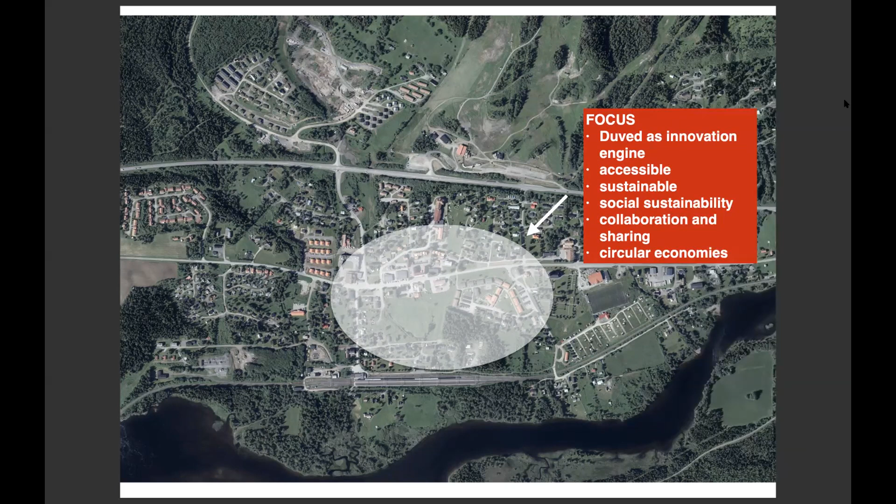Two, democracy. We wanted to involve the citizens from the very start as part of the vision shaping process, to find ways of how to implement the ideas of the citizens into the municipality. We generated village meetings, many of them, bringing the citizens to create the vision of the village together with all the others.

And we're generating and developing a digital tool that will allow the citizens to participate daily on what is possible in their own village.

And of course, we're creating models, and we have a government program for this, to connect the democratic ideas and the citizens' ideas with leading creative competence.

So I think this is important, that we're, as the European Union has said, bringing in creative people like Mia Hägg, like Shigeru Ban, like Farshid Moussavi, to help us do something unique, but based on the citizens' ideas.

And the third thing was the food system, which is really a pilot within the pilot, because everybody understands food, which means that they understand what we're trying to do.

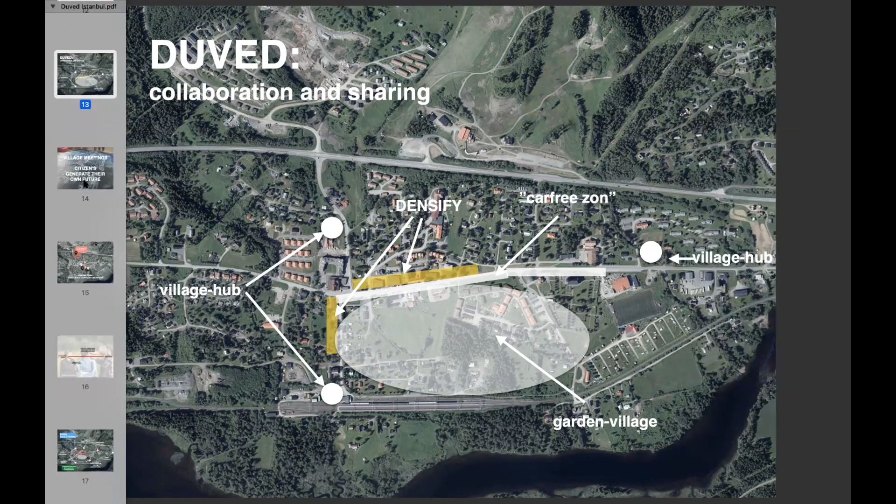We're looking at mobility and infrastructure - this is image 17 or something - trying to create a car-free village. If this is possible, we don't know yet.

And what we call village hubs, where we have co-owned cars, or car sharing. We have storage, and we also have root cellars, so that people can actually have locally produced food all year around, even up north.

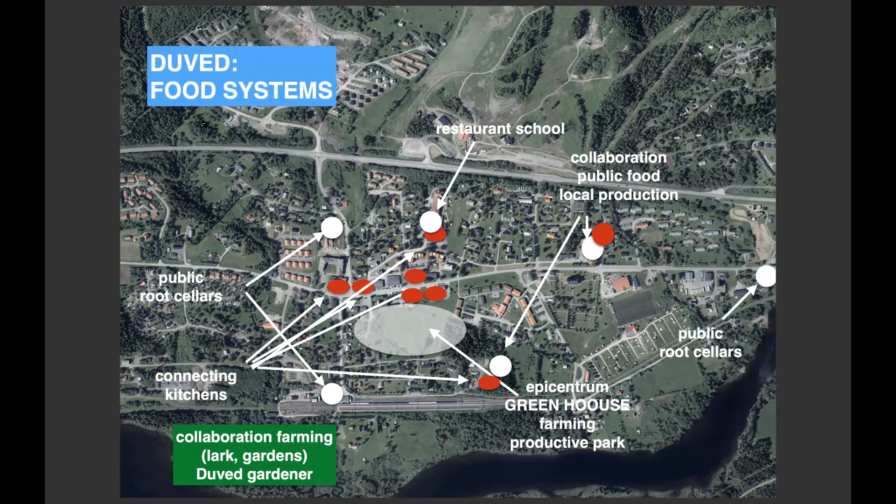And we have realized that the pandemic created new needs. So we actually have in these houses, we can see that one of them, for instance, by Elizabeth Sundin, is now very attractive for companies to come and work two weeks at a time, concentrated, eight people at a time. We didn't know from the beginning that we needed a knowledge and creative system, but that's what has become a very, very important part.

So we're developing something we call campus without university, where universities are gathering in Duved to have students and researchers studying what we do and then doing their own projects from that. It's Umeå University, KTH in Stockholm, even Harvard is interested. So this is a new possibility for rural areas where learning and doing is combined.

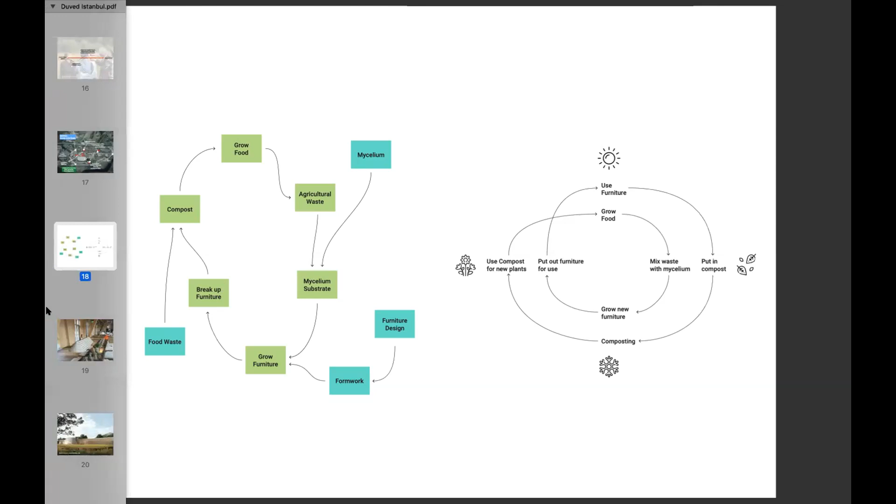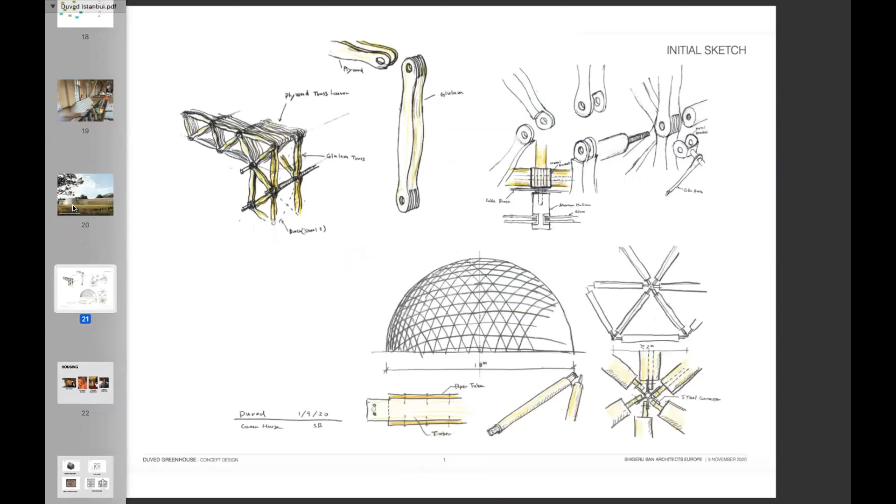And we're also creating a residency program for architects, designers, farmers, etc. And as a consequence of all this, an added and very important part is how to communicate the vision and the results. Therefore, we're planning a larger innovation summit in 2022, which I hope you all can be part of, and in 2023, and then package the results as a Duved exhibition to take the Swedish model from the Stockholm exhibition 1930 to a Swedish model 2.0 in 2025, where the village has taken the place of the city as innovation engine in the entire society.

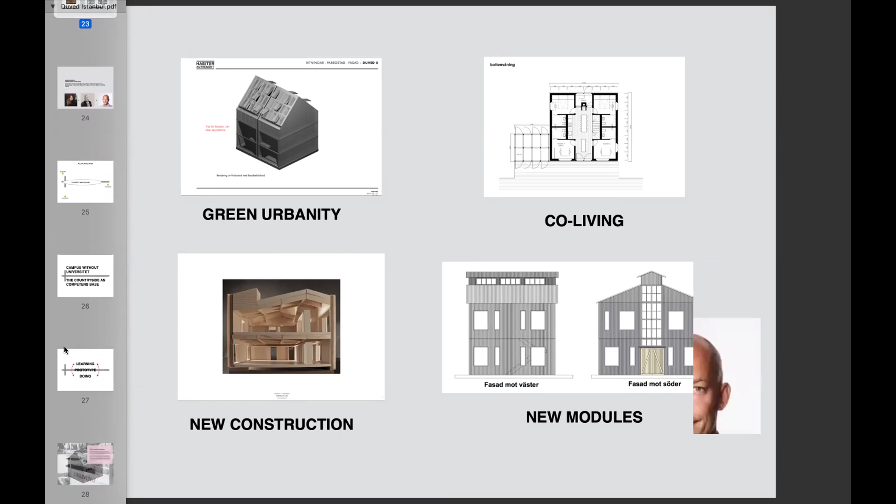That is also why this meeting today is so important. And I want to send a big thank you both to the Circle, to Çakır and everybody else in Turkey, and to the Swedish organizers. And I hope that this can lead to a long-term collaboration with Turkey. Let us generate the future together.

So Mia, now it's time to go from ideas to reality, and a very concrete example of how brilliant creatives can lead the way to the future. Thank you.

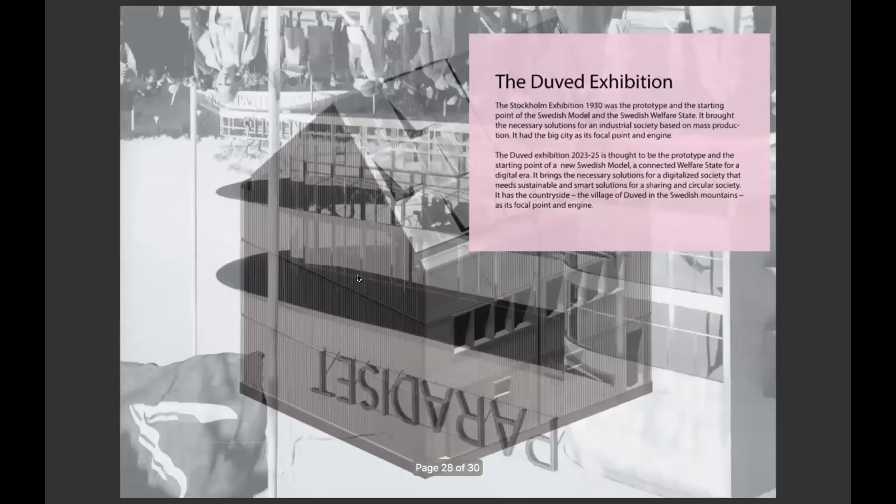Very, very impressive project. So looking forward to hearing from Mia Hägg now. She's in Switzerland at the moment. She's a Swedish architect running her own office, Habiter Autrement, in Locarno, Switzerland. She founded her office in Paris. As the name Habiter Autrement indicates, a particular focus for the practice has been innovative public housing. She started her career in Ateliers Jean Nouvel and later Herzog de Meuron, where she was the project manager for the National Stadium of the 2008 Beijing Olympics. In parallel to her practice, Mia Hägg is also involved in the academic part of our profession. Most recently, she has been teaching at Accademia di Architettura in Mendrisio. For many years, she has been collaborating with Jan Åman on various experimental projects in Sweden.

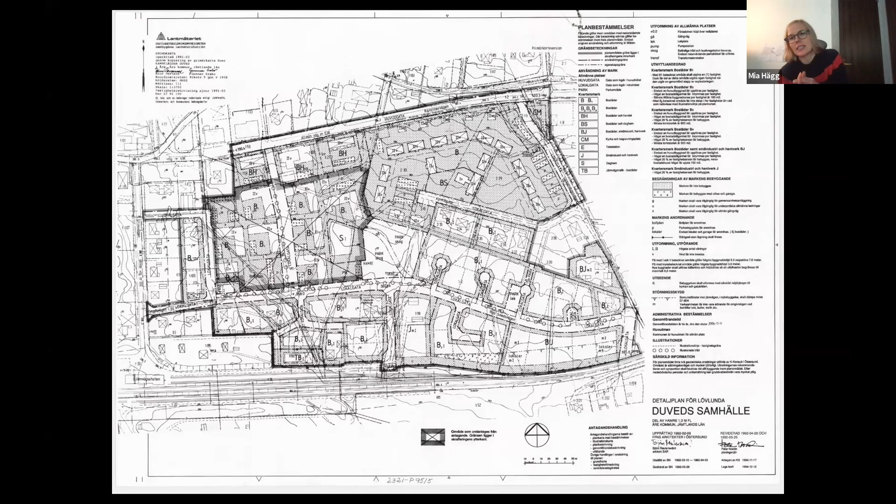The starting point for my project and the 4 architects working alongside me was a very conventional zoning plan from the 1990s for single housing units along the main street of Duved. Here's the main street, and then we have 5 plots for single housing, 2-story units of 200 square meters, which Jan already explained. This plan accepts a maximum ridge height of 12 meters, and that's a lot for a 2-story building. If you add 2 floors you get roughly 7 meters, which means you have 5 meters left to the ridge. So what can we do with the remaining volume? Number 3 in the drawing that you can see - that was the question I asked myself initially.

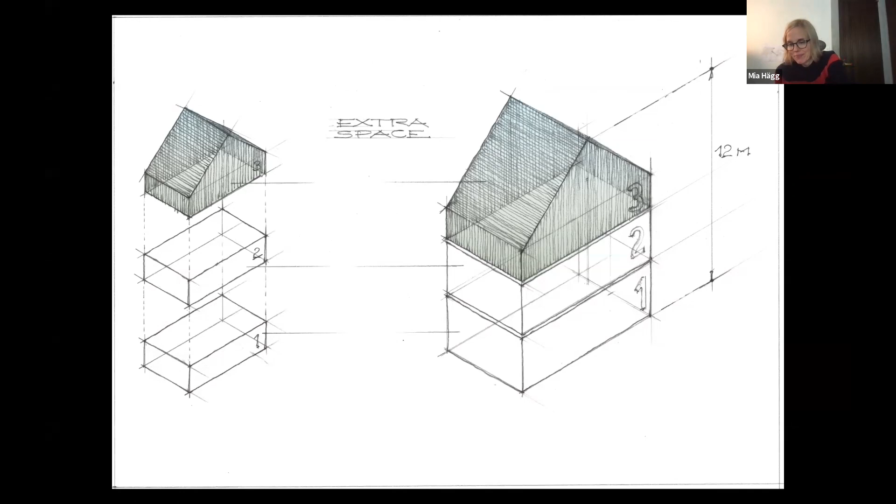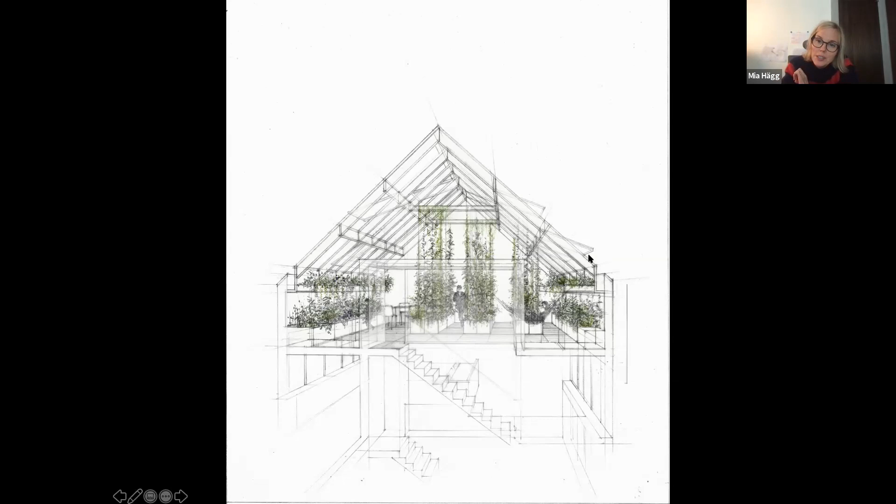A winter garden with a greenhouse under the roof. Here residents can grow tomatoes, carrots, beans in their own garden directly under their own roof. Openable windows create natural ventilation, and rainwater is collected in channels just above the planting beds.

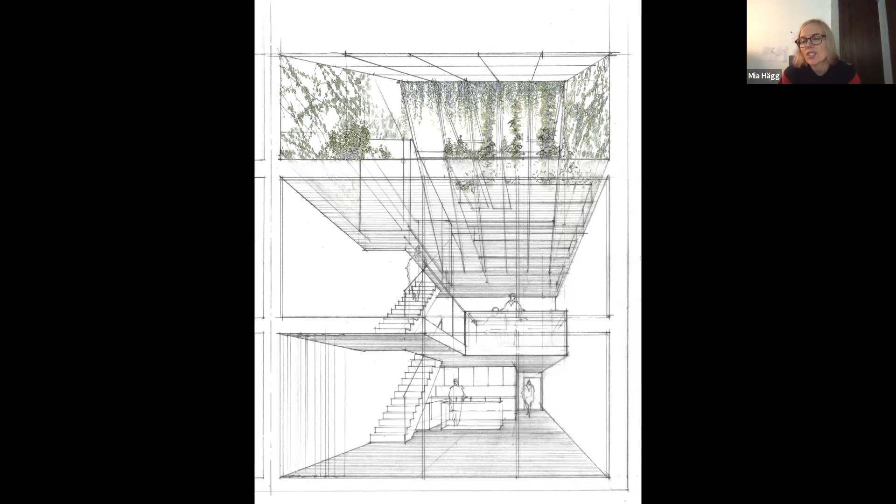It's an extra space for possibilities - a winter garden, an atelier workspace, a greenhouse. An important part of sustainable planning is also, in my view, programmatic flexibility and rethinking of function and use. Our living spaces do not need to be limited to one single function. We need more unexpected space, free of premeditated function, in our homes and workplaces.

In this project, the tectonic efficiency is also very important. The idea is to be able to build each floor like a box in the factory and stack them directly on the site.

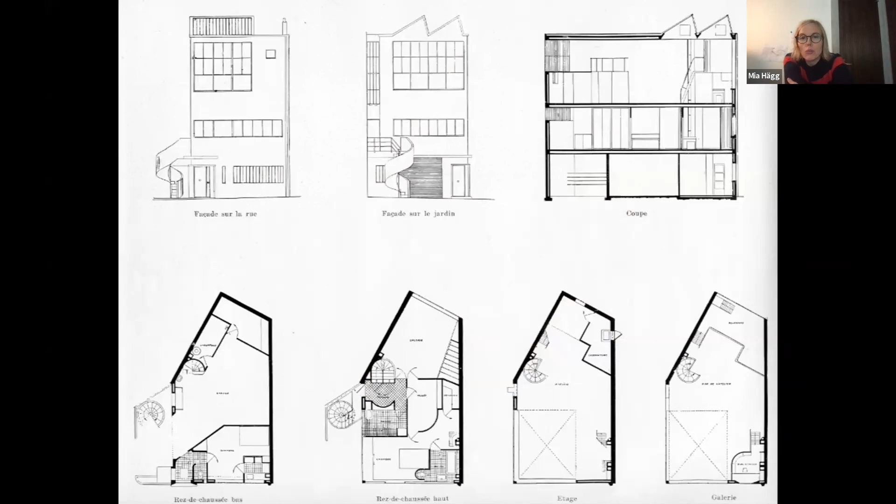The atelier was also an important inspiration in the modern movement, as you know, and here is Atelier Ozenfant by Le Corbusier in 1922, an interior.

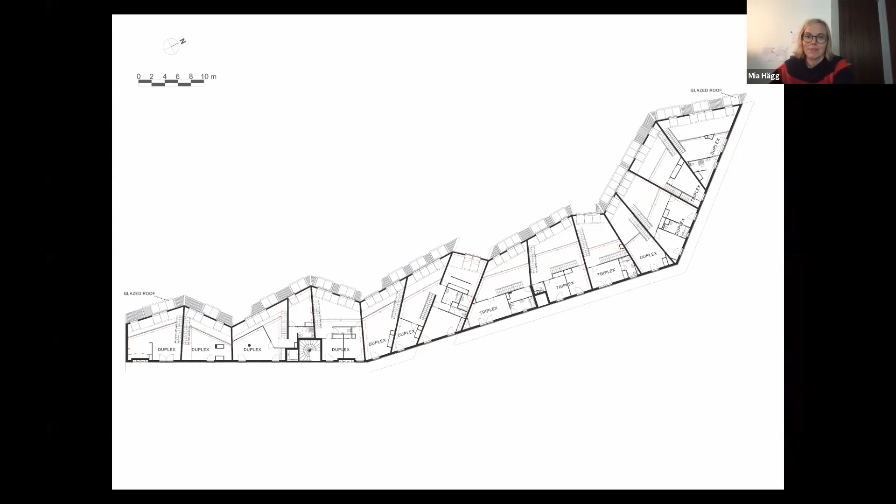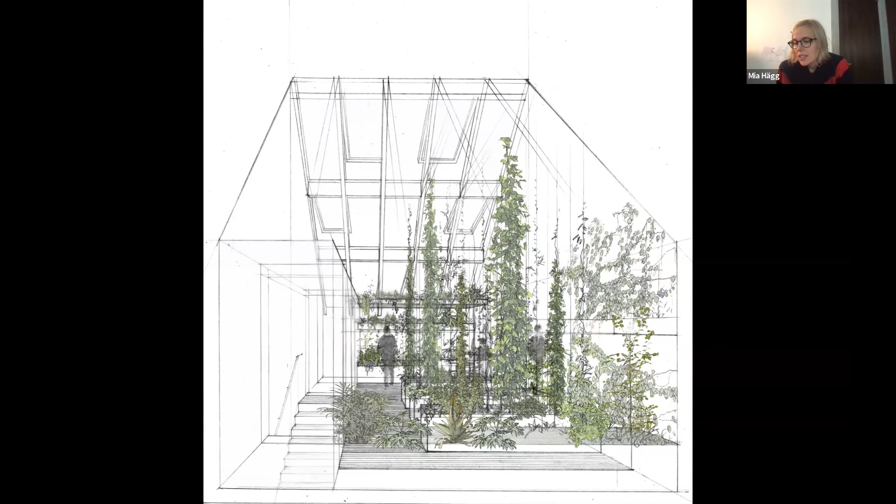Our work in Duved is relevant in the context of sustainable planning because we are prototyping both new typologies for housing, for living, as well as a model for self-sufficiency. Right from the start, the idea was that the typology could be further developed in other places. And of course, this atelier house has great relevance for urban settings where the need for growing food locally could be even greater. Il faut cultiver son jardin.

We must cultivate our gardens, like Voltaire wisely said. Thank you.

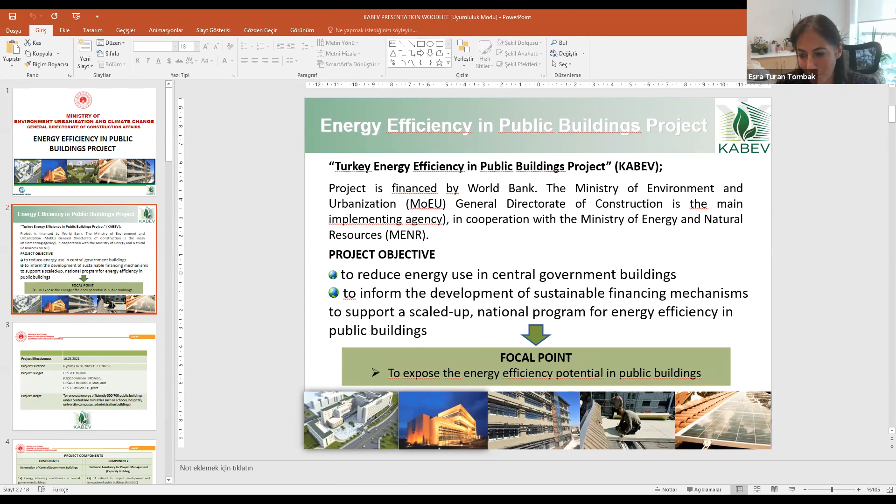Thank you very much for the presentations before me. Yes, I really envy, I want to come and live in Duved, and Mia, really, as an architect, I really envy. The designs are so good, and I would like to live in this place. What are the conditions? Maybe you can help me. Because I'm living in a big city, very crowded every morning, and after work I'm spending nearly more than 1 hour to reach home, as there is huge traffic jam. So it was so good.

Okay, thank you, Ece Hanım, for introducing me. Yes, I would like to introduce our project in energy efficiency in public buildings. Yes, you were talking about micro scale. Now this is a little bit, I think, macro scale.

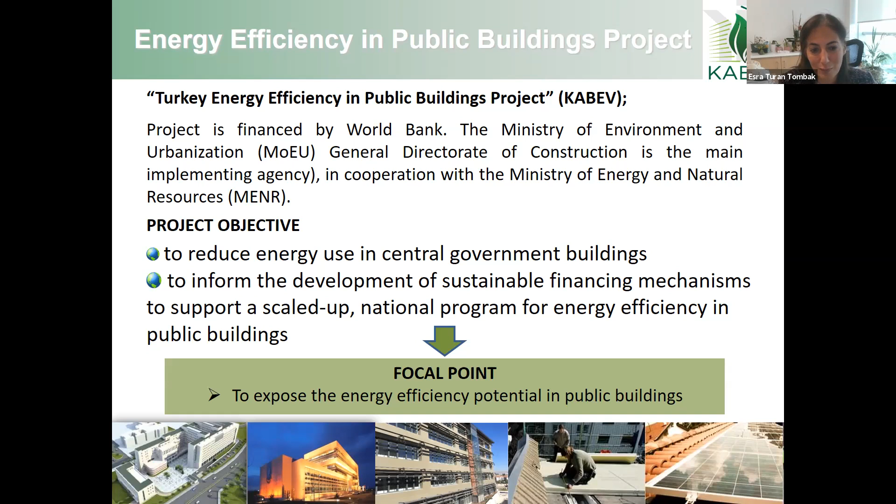What we are doing, what is our aim, is to reduce the energy use in central government buildings, and also we try to aim to inform the development of sustainable financing mechanisms to support a scale-up national program for energy efficiency in public buildings.

Our project is a 6 years project. The project duration is 6 years, and it will finish at the end of 2025. We have a total budget of $200 million US. Our target is to renovate energy efficiently about 700 public buildings under central line ministries, such as schools, hospitals, university campuses, and administration buildings.

Yes, we have two components in our project. One of them is the renovation of central government buildings, and the other one is the technical assistance for project management. Our goal in the public buildings is to save at least 20% energy consumption, and the payback period for this savings should be 12 years.

And if we are using extra measures, if we have some new technologies in buildings for energy efficiency, then the payback period is a little bit longer, it is 20 years. We are also renovating the public buildings using energy performance contracts. Within our project, we will have 5 or 6 nearly zero energy buildings.

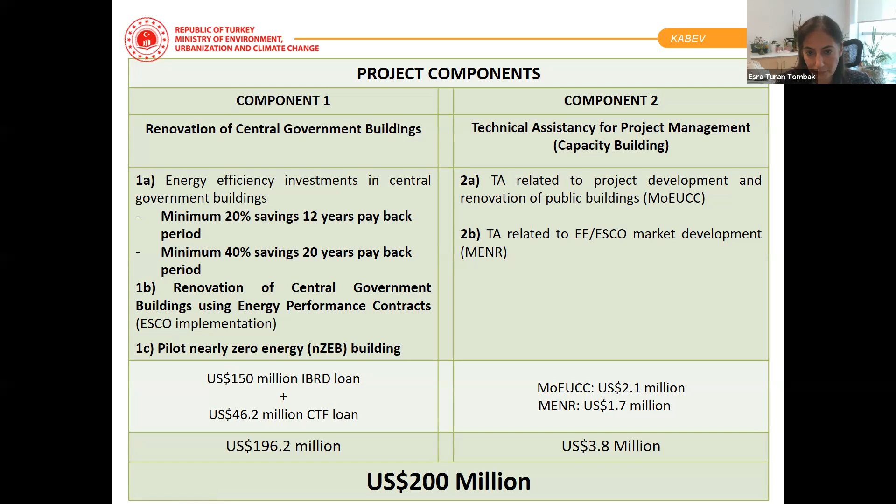What we expect at the end of the project, what are the sustainability measures? As we are focusing on energy efficiency and use of renewable energy sources, we will reduce fuel and electricity consumption, and we will have budgetary savings as a result of these energy savings. We will reduce the CO2 emissions resulting from these energy savings, and the comfort conditions in the public buildings will rise, and awareness will be raised on energy efficiency.

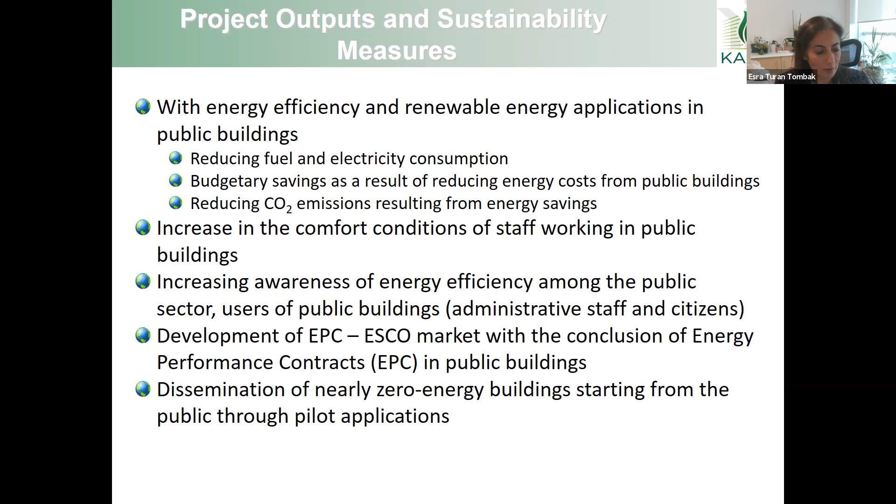We will develop energy performance contracts in public buildings, and we try to disseminate nearly zero energy buildings starting from the public sector through pilot applications. The government should be the lead in the sector for new approaches in implementing especially these energy efficiency measures.

When you look at the building stock of Turkey, we have over 9 million buildings, and about 100,000 of these are public buildings. So we cannot include all the public building stock in the project. We have some eligibility criteria and some selection criteria for selecting the buildings.

As Turkey is in the earthquake region, the buildings must be structural and seismically safe, and the buildings must not have gone through a full energy efficient renovation in the past 10 years, and the buildings must be at least 5 years old. When we started the project, it was 2019, so we are choosing buildings constructed before 2014.

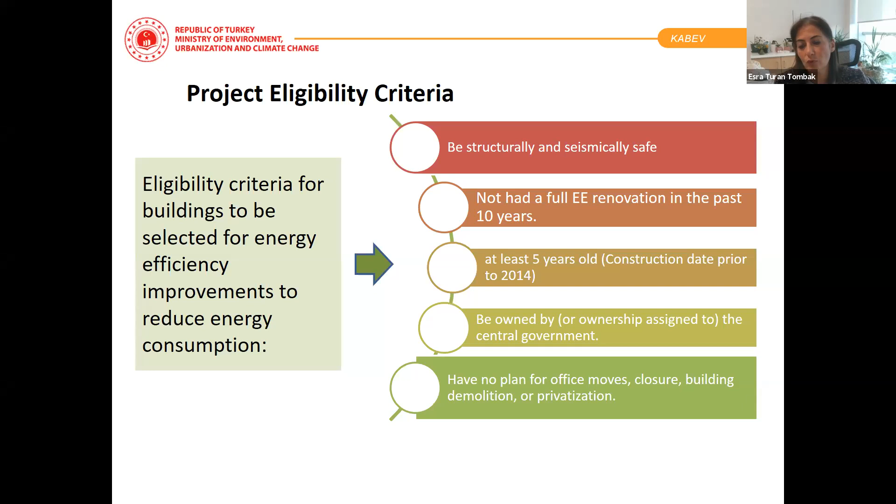The buildings must be owned by the central government. Municipality buildings are not included in our project, and there should be no plan for office moves, closure, building demolition, or privatization.

We are also looking at the building area, construction area, the facade, what are the possibilities, what is the potential in the building facade. If there is a potential for renewable energy, the climate zone and the energy use in these buildings are the other criteria we are looking at while selecting the buildings.

What we are doing first is we look at the building envelope, if we can insulate the walls, if we can change the windows with efficient ones, and if we can implement some cool or green roofs. Afterwards, after checking the building envelope, we check the heating and cooling systems, including water heating.

We upgrade or replace the boilers. We can change the fuel from oil to gas. The control systems are important to control the energy use.

We are checking the building to see if we can implement cogeneration or trigeneration, automation, waste heat recovery. Also in the lighting system, we are trying to upgrade by using light emitting diodes or energy efficient lighting systems, changing the system into an energy efficient lighting system.

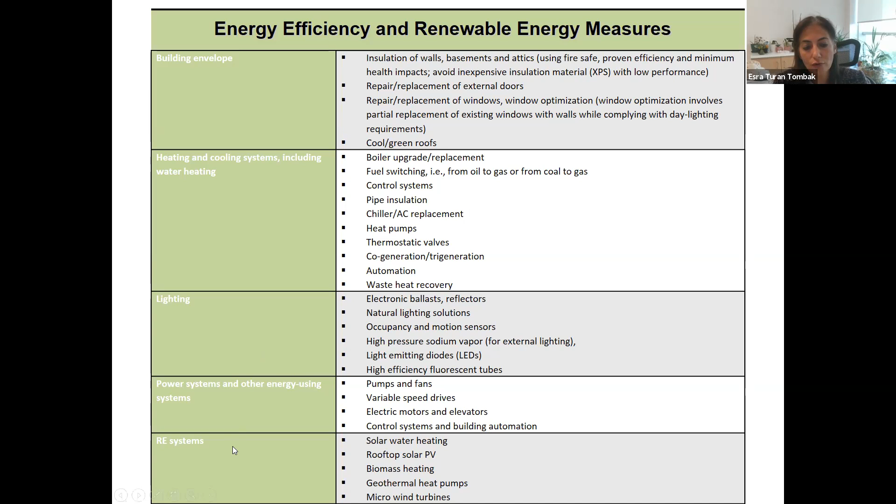First, we are making investment grade audits in the buildings to evaluate which energy efficiency systems and measures can be taken in these buildings. Then after the investment grade audit is finalized and approved, we prepare the technical designs, then construction and implementation starts.

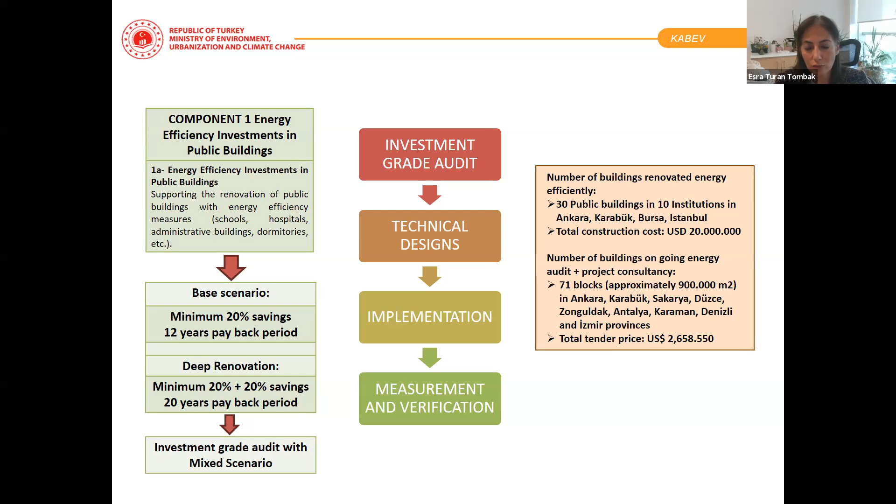After the implementation, the most important thing is to get this energy efficiency investment back in 12 years. So we are checking, measuring and verifying the savings, to see if we can reach the calculations or feasibilities that we made, whether they are correct or not. In the energy performance contracts, we are also doing investment grade audits, and these are design and build contracts. The company goes and makes the energy audits.

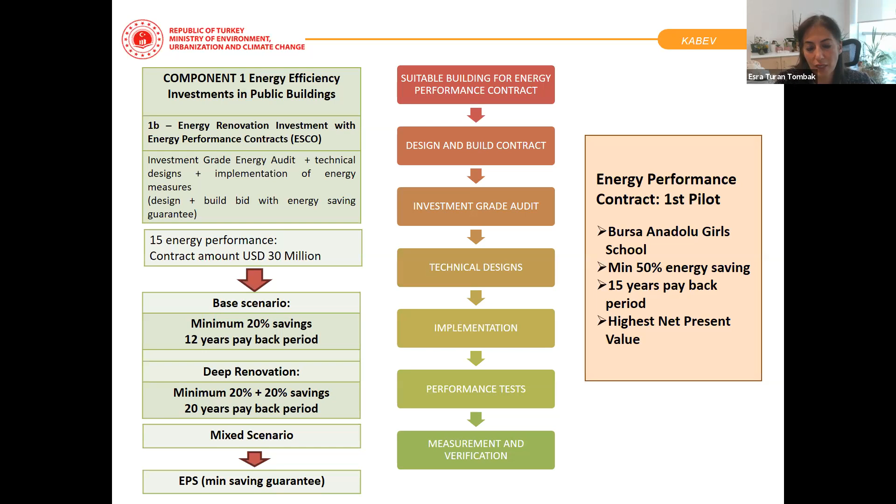We agree on the energy efficiency measures that this company can do, and then they prepare the technical designs and implementation. Afterwards, performance tests are done, and measurement and verification is done in one year's time.

Also, as I said, we will have NZEB pilots. Here in Turkey, we haven't set NZEB requirements yet, but in this project we prepare some requirements. There will be a reference building, and the NZEB pilot must have 40% of primary energy saving, and 25% of the primary energy consumption should be from renewable source. For hospitals, as it is not so easy to have this 25%, we assume 5% of the primary energy consumption can be from renewable source, and the energy performance certificate class should be A.

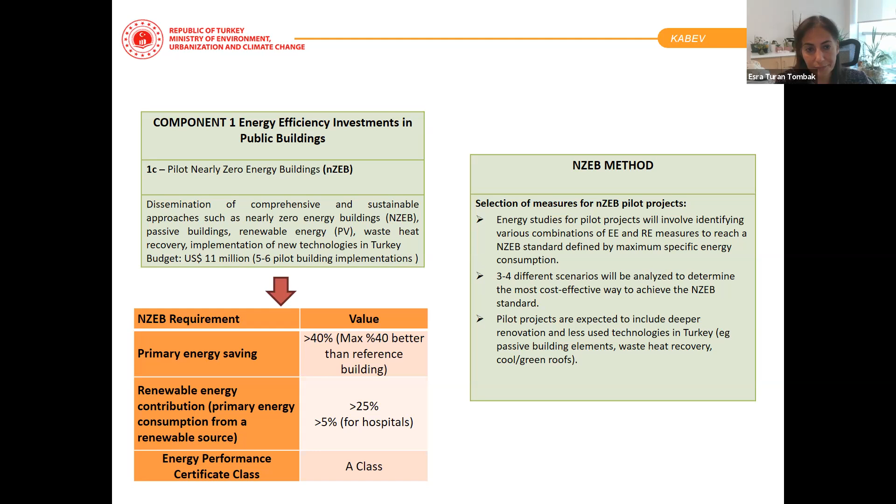Here in this table, you can see the results of our first implementations. In our first implementation, we have 10 institutions, including ministry buildings, schools, a university building, and hospitals. As you can see from the last column, the energy savings differ from approximately 25% to nearly 80%, and the average saving in all these 10 institutions' buildings is approximately nearly 50%.

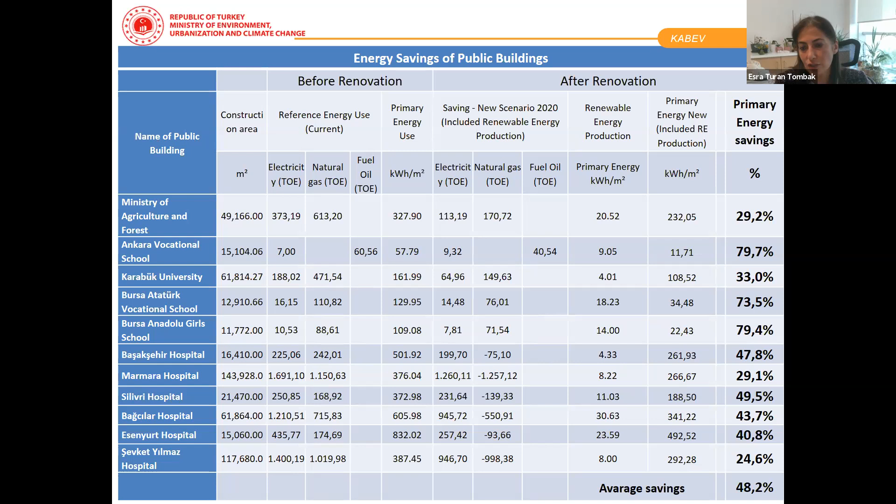We have nearly finalized the implementations in these 10 buildings, and beginning from 2022 we will have the measurement and verification stage. I want to show you photos from the buildings where the renovation has finished.

We improved the heating system. We changed the boiler with an energy efficient one, put thermostatic valves, and renovated the circulation pumps. In the lighting system, we replaced it with LED luminaries, and on the roof of the facade there is a 50 kilowatt electricity generation capacity photovoltaic installation.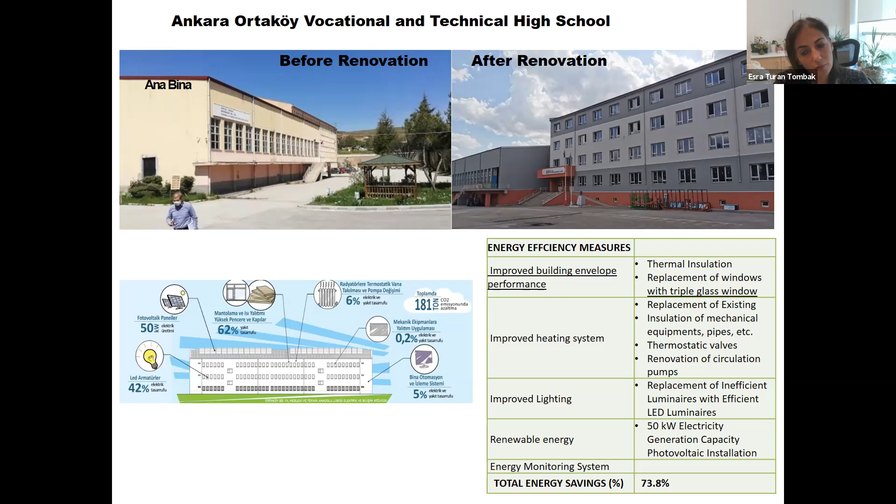We applied an energy monitoring system in this building, and the total energy saving is approximately 74%. And this is the ministry building.

In the ministry building garden, there was an open parking area. We implemented a photovoltaic installation with 400 kilowatt electricity generation capacity, and there will be an electric vehicle charging station in the parking area.

Also, we made some renovation in the chillers of the building, established an automation system, and changed the lighting with LED luminaries. This is a new, newly constructed building, that's why the energy efficiency measures we implemented are not much in number, and in this building the savings are 30%.

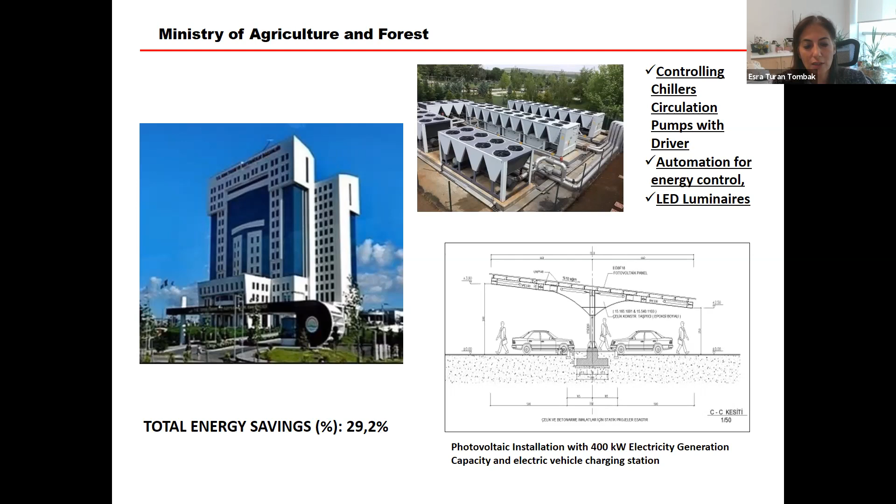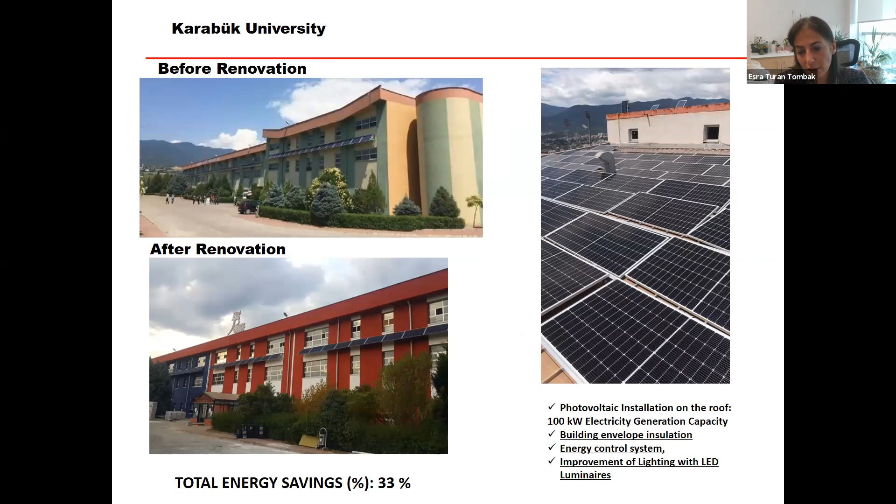This is a university building. Again here we insulated the outer facade envelope and changed the windows. Also, the main energy efficiency measure here is the use of photovoltaic panels having a capacity of 100 kilowatts.

And this is the energy performance. It is also a school. In this building, after the renovation, there will be 70% of energy saving.

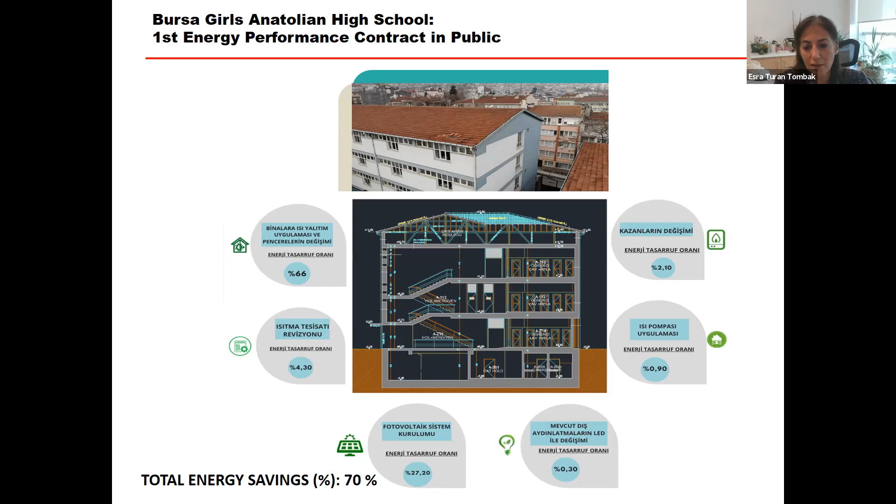Again here we insulated the building envelope, changed the windows with triple glass, and changed the heating system boilers. There is also a photovoltaic panel on the roof having 250 kilowatts electric potential. And we also look for the comfort, or I can say the contribution of the building users.

While choosing the color of the paint of the school, the students of this school participated in the process, and they chose their own school's color. This was really nice, as they were also part of the renovation process.

Thanks for listening to me.